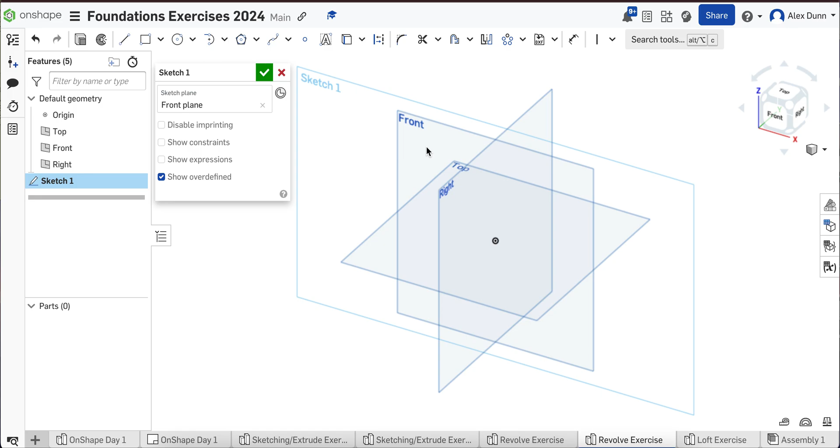So just like we did on the last exercise, you're going to create a new part studio, and you could rename that Revolve Exercise. And we're good to go. Okay, so the first thing we need to do is create a new sketch, and I'm going to create that on the front plane. You can go ahead and name that sketch Cup Profile, and we're going to outline what our cup is going to look like.

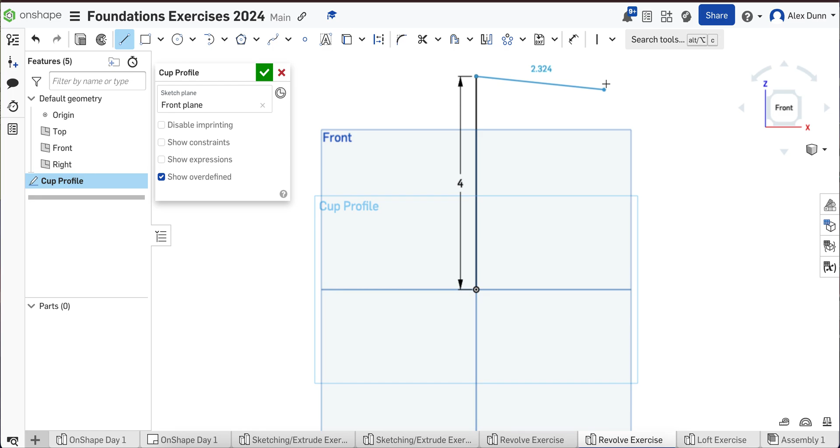So we're going to create a sketch using all lines. Starting at the origin, you always want something to be starting at the origin. So my cup is going to be 4 inches tall. It's going to be 2.5 inches wide there. I'm going to create a diagonal line, close my shape, and the bottom of my cup is going to be 1.75. Not 0.75, 1.75.

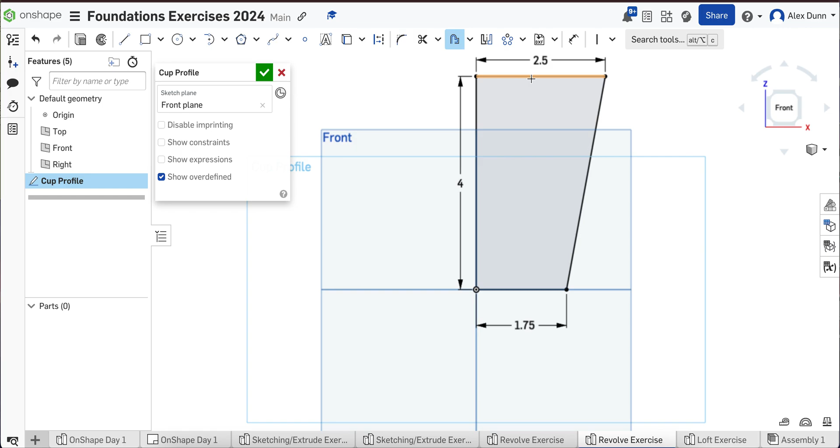Great. Okay, now we're going to use the offset tool to offset all outer lines to 0.25 inches. This is going to help us create the inside of our cup. So I'm going to choose offset, and I'm going to choose all 3 of these outer lines, and you want to make sure that's 0.25, so I'm going to click down. If you need to edit it, edit it. If not, you're just going to hit enter, and then you have those lines.

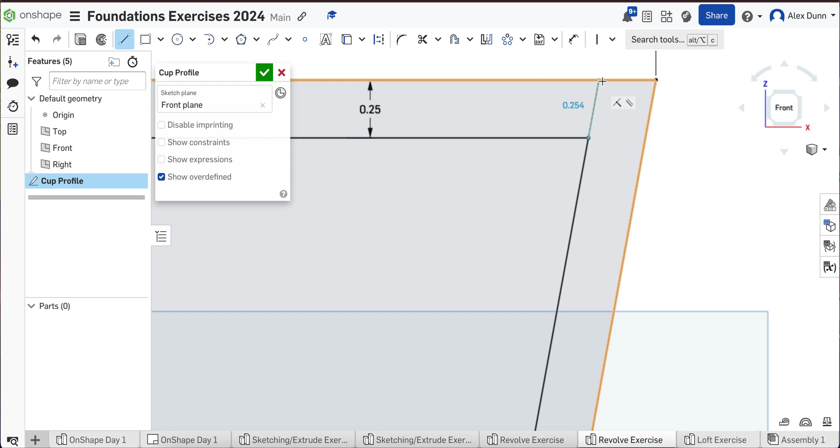Okay, the last thing we're going to do is add a line to create like an opening at the top of our cup. So I'm going to essentially click on this corner here and then click and drag up. You'll see when I'm creating this blue line that I want that yellow dashed line to be showing, so I know it's completely parallel to the existing line.

And you don't need to dimension that. You could just hit escape. It should turn blue. If it doesn't turn blue, come see me and I will help you with that. Okay, so now we're good. We're going to hit the green check.

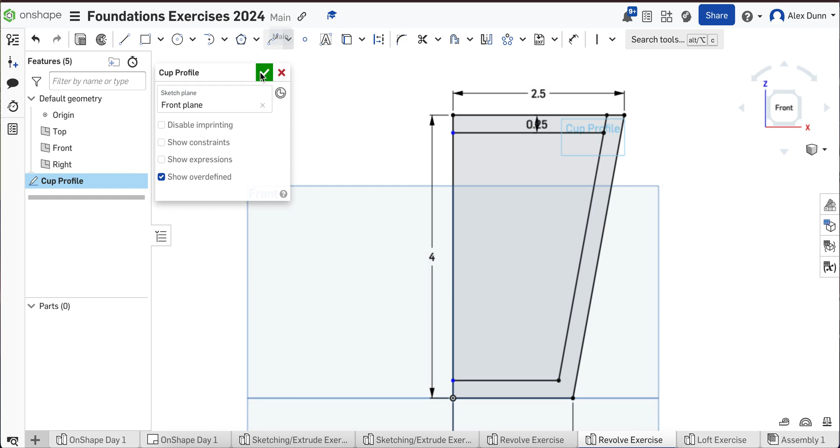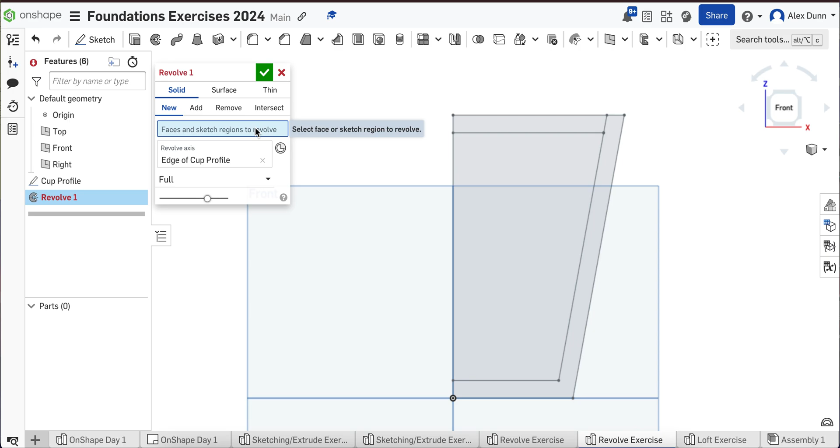So now we're going to use the Revolve tool. So we're going to choose our Revolve axis first. So I'm going to click Revolve axis. It should turn blue. Our Revolve axis is this line, the vertical line going all the way up. The faces and sketch regions to revolve: I just clicked on that, that's why it turned blue. And I want to revolve just the outside of that shape we created, and now you see a little bit of a cup. Okay, so I'm going to rename this Cup.

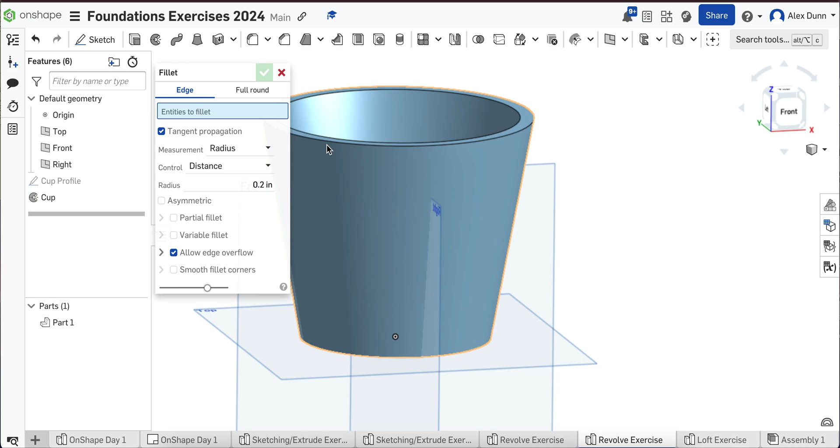And now obviously we have our cup, but it's kind of sharp, right? Sharp edges. We want a nice, comfortable cup. So we're going to use this fillet tool, and we're going to fillet the edges of our cup to 0.1 inches. And hit the green check. The computer's going kind of slow, and that's good. Okay? You don't need to rename it because that's just a fillet. The name of the tool is basically what we're doing.

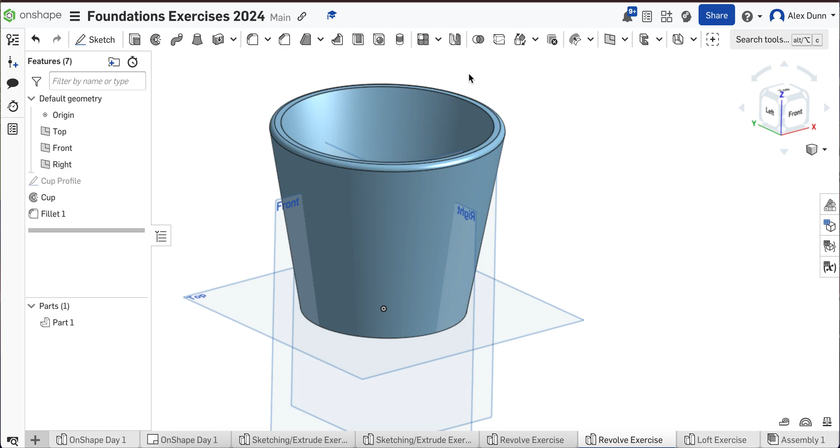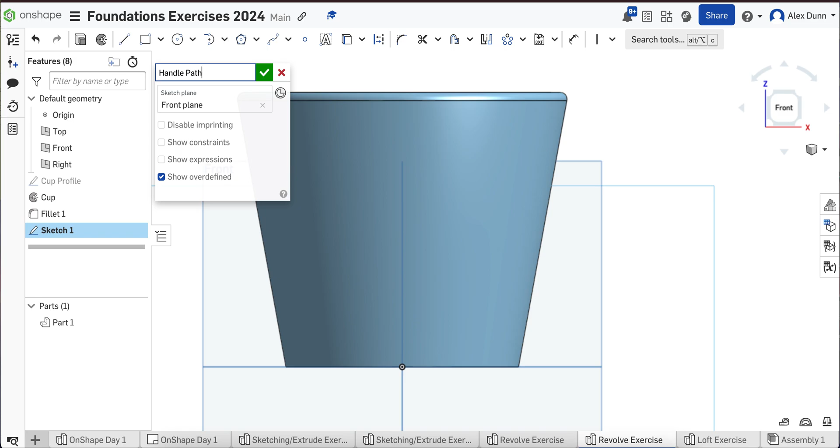All right, so now we're going to create the handle of our cup. So I'm going to go back to my isometric view just so I'm looking at it from a default angle. So I'm going to create a new sketch, and I'm going to create that sketch on the front plane. And then I'm going to look at things from the front. I am then going to name this Handle Path. Okay, now my cup profile sketch is hidden. I want to show it because I'm going to have to use it for a couple things.

Now we're going to draw the path of the handle. So I'm going to use a 3-point arc, and I'm going to start that arc on this inner dashed line here. So I'm going to create that arc, and that arc is going to be 0.75 inches.

I am then going to create a line off the arc that connects to this dashed line. That's 1.5 inches. Now this arc looks a little funny. It doesn't look perfectly smooth. So I'm going to go back to my constraints here and choose tangent. And I want the arc tangent to the line. It'll kind of lock things in.

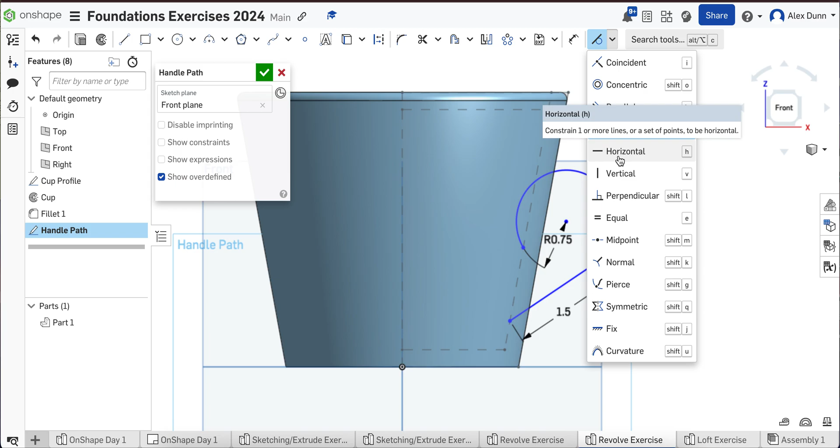I also want these 2 points to be horizontal to each other. So let's see if that works. Nope, I don't want it actually horizontal. I want them to be, let's see. I don't want them to be equal. I don't want them to be perpendicular. Let's see if I can drag this a little bit down.

Okay, so what I'm actually going to do, since I don't want to put more constraints on this and introduce more constraints to you, I'm going to just delete this arc, and I'm going to go ahead and redraw it. So when I'm creating my arc, I want the points of the arc to be 0.75, to be in line with each other.

Now I can use a new constraint called the coincident constraint to connect these two dots together. There we go. And make sure that our arc and our line are tangent to each other, and that looks much better.

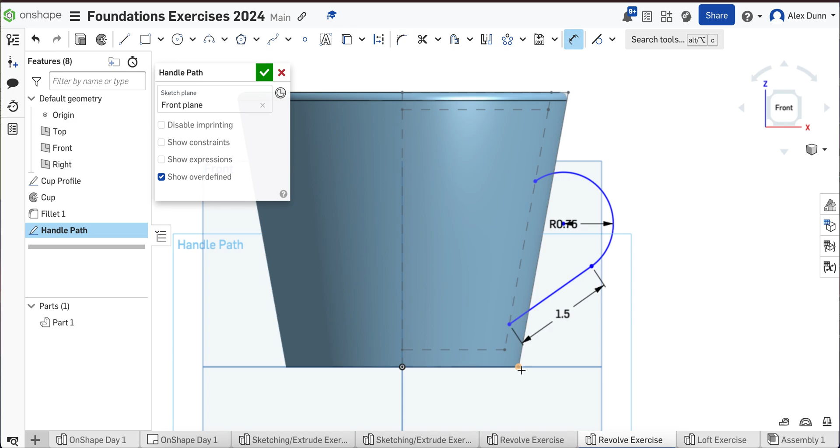Okay, so now let's position where we want our handle to go. So I'm going to use the dimension tool, and I want the top of my arc, this point, and the bottom of the cup to be 3 inches from each other. And then we're good to go. I'm going to hit the green check. So now we have kind of the outline of what our cup handle is going to look like.

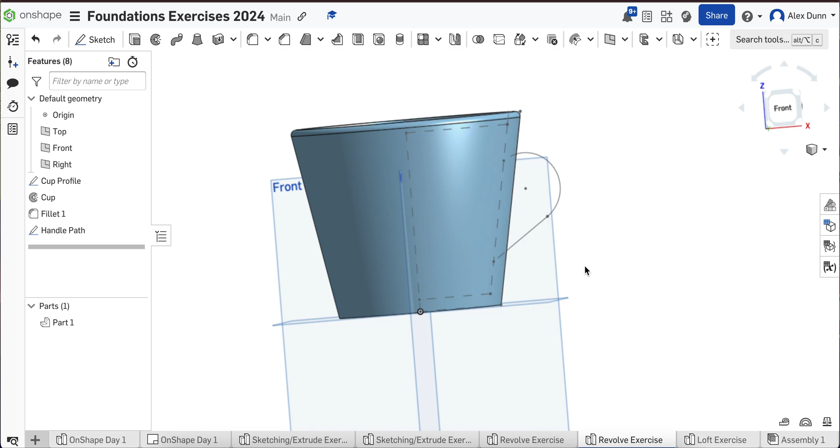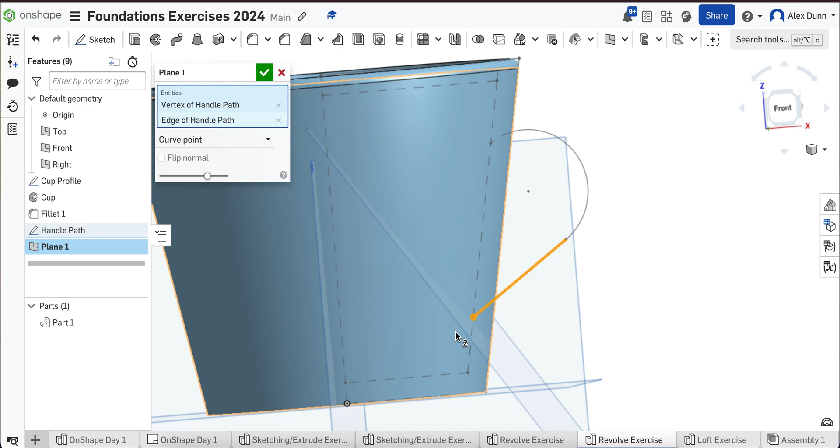So now we need to create a new plane in order to finish up this cup handle. So I'm going to click the plane tool. I'm going to choose the type of plane. It's going to be a curve point plane. The entities you're going to choose are the edge of the path, the point at the end of this line, and the line itself. And now you see we have an angled plane. That's what we want. So I'm just going to keep that as plane 1.

Now we're going to make a new sketch on that new plane that we just created. And we're actually going to start with a rectangle here because I want this to be a little bit of a not perfectly circular handle. So I'm going to zoom in with my center point rectangle, and I'm going to start that center point rectangle at the bottom point of my cup handle.

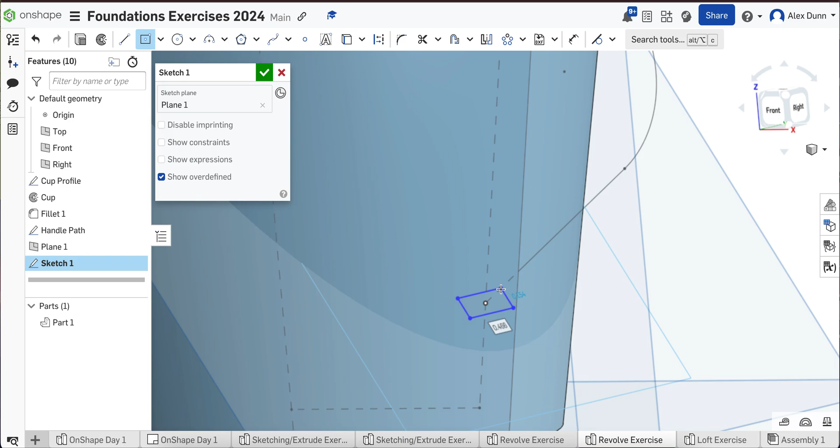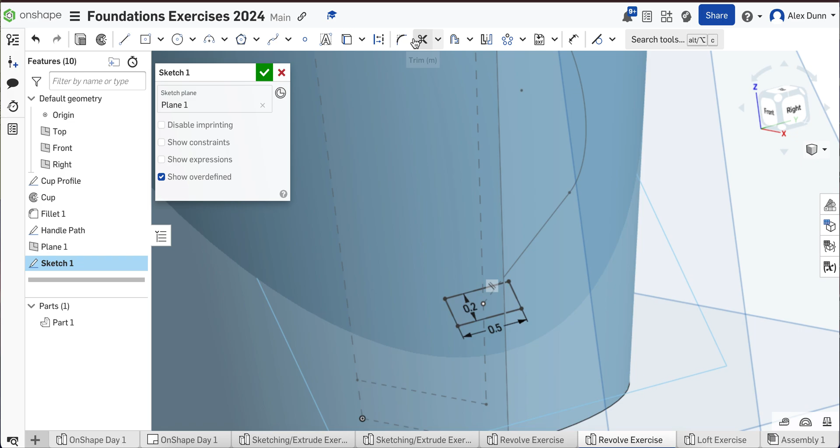The dimensions of that rectangle are going to be, let's see how 0.5 by 0.5 looks. That's a little too square for me. So let's do 0.5 by 0.2. That's a little better, right? We want this to be a comfortable cup. I am then going to use my sketch fillet tool, and I'm going to fillet the edges.

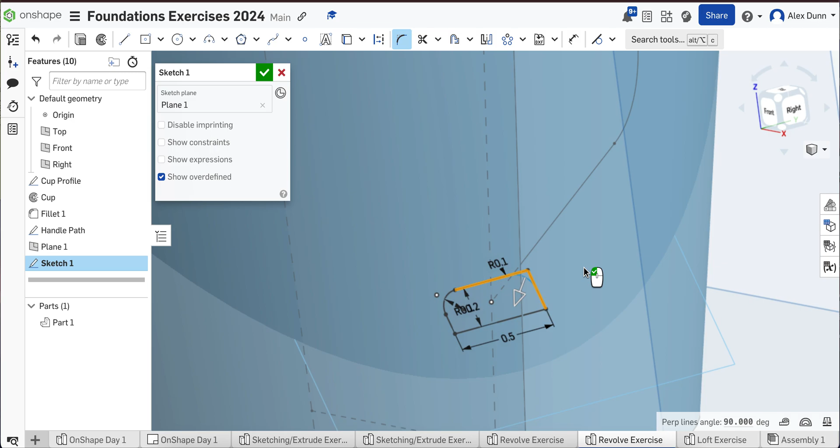I don't want 0.25, so let's see if it lets me change this. It's not letting me change this. Let's just slide back a bit. I want it to be 0.1 or as close to 0.1 as possible. So sometimes when I click down, there we go, I'm able to change it to 0.1. So I'm going to do that to all 4 corners. And that's what the profile of our cup handle is going to be. So I'm going to rename this handle profile and hit the green check.

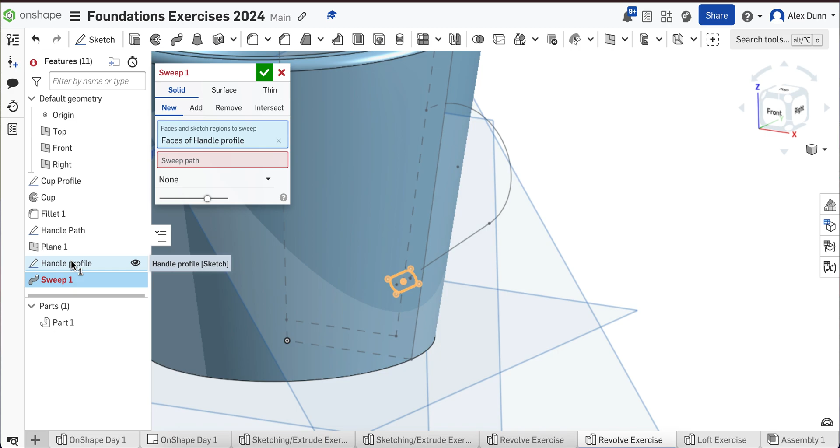Now we're going to use our new tool, which is the sweep tool. So the faces and sketch regions to sweep. What I want to sweep is the handle profile. So I'm going to click on that. The sweep path is going to be the handle path. That's why we name everything accordingly. Make sure it's an add sweep and hit the green check. And there is our basic coffee cup.

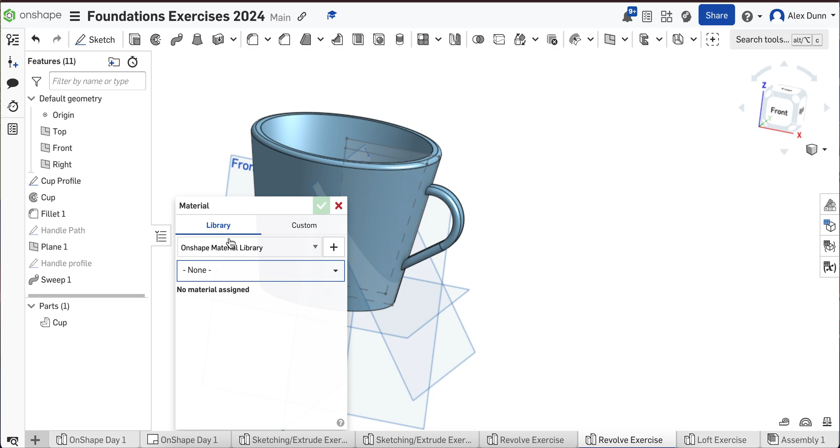Okay, so you're going to rename part 1 cup. Rename cup. Let's assign material. Let's try porcelain. Porcelain. Make it somewhat realistic. I'm going to click on cup, click on the mass, and your mass should be within 0.1 pounds of what my mass is here. If it's really off, come see me and we'll talk about it.